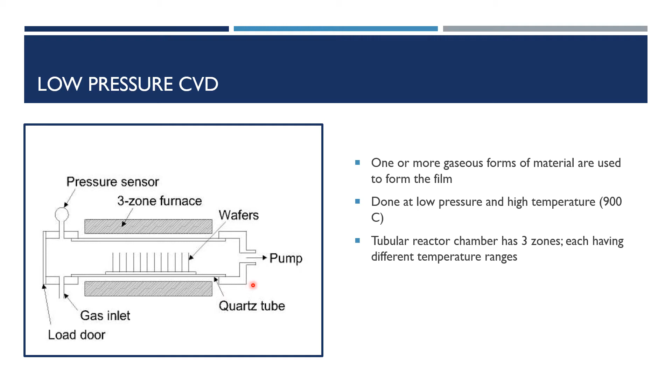As you can see, it has a reactor chamber which is known as the quartz tube, and this chamber is heated by a three-zone furnace. The name itself depicts that it consists of three zones and each zone has a different temperature range. For example, if the first zone has a lower temperature range, the third zone will have a higher temperature range.

So this is used to deposit different materials on the wafers at different temperatures. For example, the deposition of tungsten on the wafers is done at 400 degrees Celsius, whereas the deposition of silicon oxynitride is done at 800 degrees Celsius. So wafers which need silicon oxynitride can be kept at zone 3, and those wafers which need tungsten can be kept at zone 1 where the temperature is low. That is how the three-zone furnace is used. It heats the quartz tube.

Now the gas is provided through the inlet and there is a pressure sensor which monitors the pressure inside the quartz tube. The wafers are placed on the bottom of the quartz tube and are loaded through the load door. If the pressure inside the quartz tube is higher than the required value, it can be reduced by opening the pump and the outlet. So this is how the process setup looks for low pressure chemical vapor deposition. So the gas is provided through the inlet.

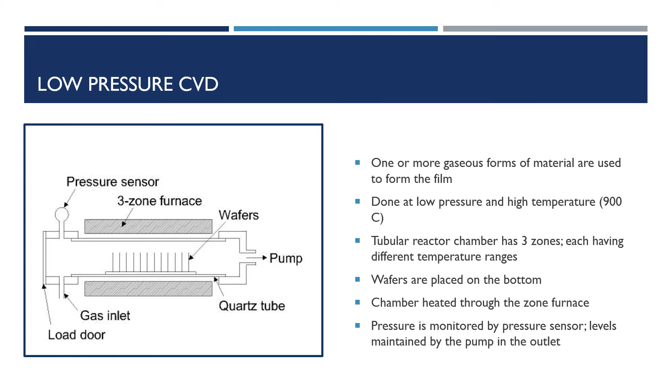It reacts inside the quartz tube at the required temperature maintained by the three-zone furnace and the required pressure maintained by the pressure sensor, and the reaction gives products, or the thin film, which gets deposited on the wafers placed inside the quartz tube. Thus the source gases react to form the products which get deposited on the wafers. We will now see some examples of the films deposited on different types of wafers.

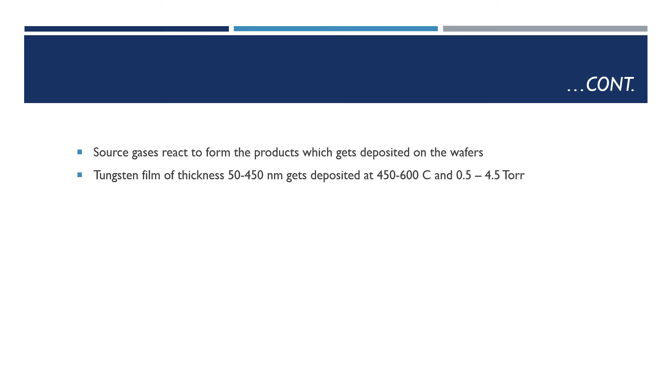The tungsten film of thickness 50 to 450 nanometers can be deposited at 450 to 600 degrees Celsius and 0.5 to 4.5 torr pressure. This is done from the decomposition of tungsten hexacarbonyl at 400 degrees Celsius in argon atmosphere. Some other commonly deposited materials are SiO2 at 450 degrees Celsius, silicon nitride at 770 degrees Celsius, and silicon oxynitride, which is a complex compound, at 800 degrees Celsius.

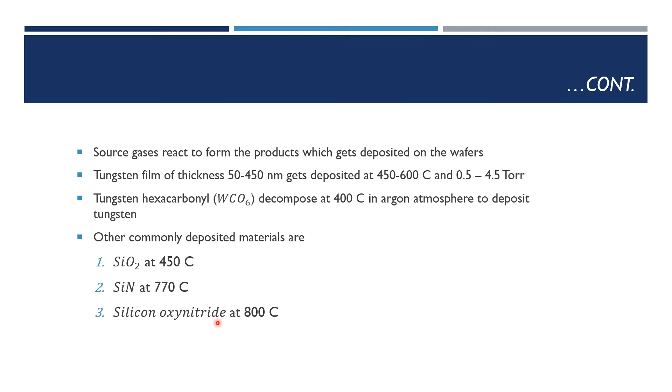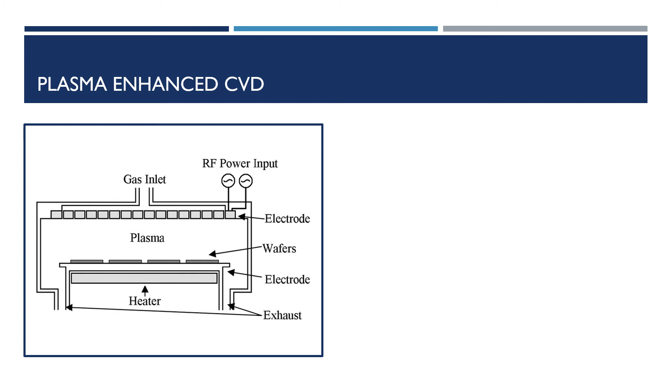The second method of chemical vapor deposition is the plasma enhanced CVD. The figure shows the process setup for this method. It operates at a lower temperature than the low pressure chemical vapor deposition we saw earlier. Plasma generation occurs in this method, as the name suggests, and plasma generation happens when the gases decompose through an electric discharge. The plasma consists of electrons, radicals, and ions of the supply gas. The presence of the plasma enhances the deposition of the supply gas onto the wafers.

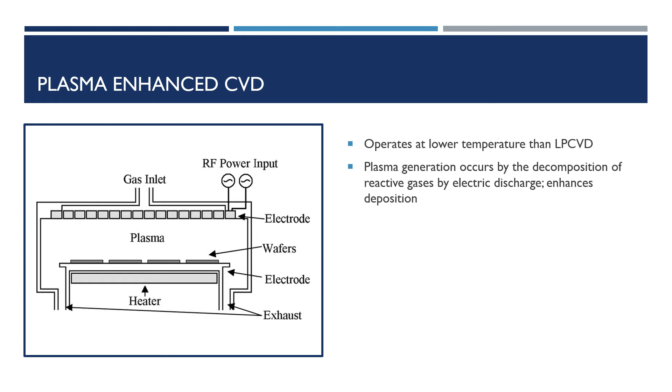The plasma enhanced CVD unit consists of a top and bottom electrode, a gas inlet to the top electrode with an RF generator, supported by a gas pod and MFC. The gas pods are units which can house different supplies of gases, and when selected, a particular gas will be provided to the gas inlet, and the MFC, the mass flow controller, controls the amount of gas coming into the gas inlet. Thus, the gas pods help select a particular gas, and the MFC helps control the amount of gas inlet.

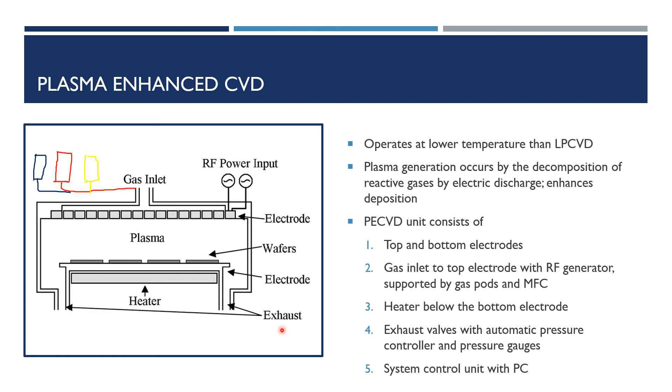A heater is present below the bottom electrode, which controls the temperature inside the chamber. The exhaust valves are present with an automatic pressure controller and pressure gauges. This will control and maintain the pressure within the chamber. A system control unit with a personal computer is present to control the overall working of the system. So, the working happens like this.

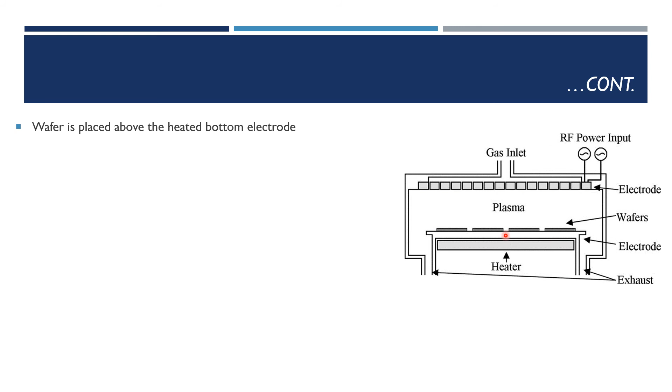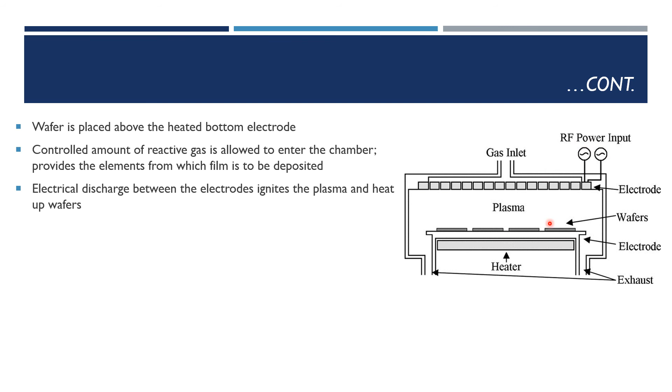The wafer is placed above the heated bottom electrode, as you can see in the figure. The controlled amount of reactive gas is provided through the inlet into the chamber. This supply gas provides the elements which have to be deposited on the wafers. The electric discharge provided through the RF power input between the electrodes generates the plasma and also heats up the wafers.

The plasma present between the top and bottom electrodes bombards the incoming gas molecules, causing their dissociation. So in this method, the plasma helps increase the dissociation of the supply gas molecules by bombarding them with the radicals, electrons and ions present in the plasma. Thus, the plasma decomposes the incoming reactant gases, generating ions and radicals, which recombine to form a surface film which will be coated on the wafer.

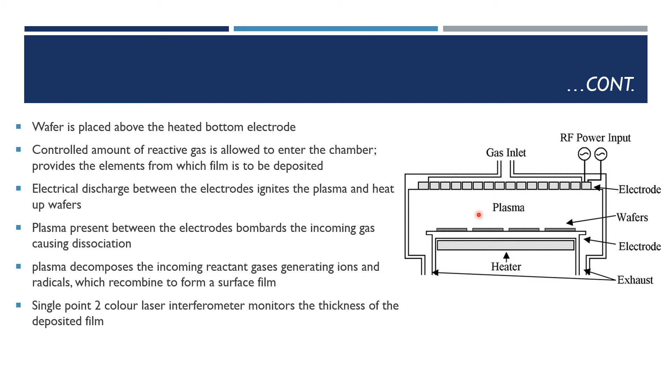A single point two color laser interferometer is used to monitor the thickness of the deposited film, and whenever the required thickness is achieved, the process is stopped. Some examples: for silicon deposition, trimethylsilane gas is used, and for germanium deposition, germane gas is used. Germane is a gas consisting of germanium and hydrogen. Here, the germanium-hydrogen bond is very reactive.

Thus, to summarize the process, a suitable amount of gas is provided to the inlet. A plasma is developed between the two electrodes by means of an electric discharge due to the RF power input. The incoming gas molecules bombard with the plasma particles, causing the gas molecules to dissociate. The dissociated gas particles as well as the plasma particles recombine to form the required film which is to be coated on the wafer.